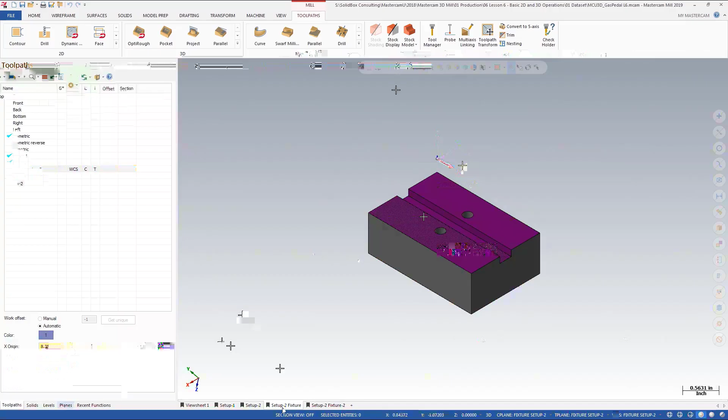If we view our stock, it is already ground to size in the Y direction, but we have to fit the top section exactly where our part's going to sit. So this is going to allow us to explore a few operations such as slicing, creating a contour, ultimately flipping this over so we can do the cores and drills on the other side.

But to get started, I want to explore how we would insert a manufacturer's model for something like a Vise. Now, a lot of times you get these from your programs, but it's always a good idea to insert this type of fixturing whenever possible, just to make sure that we can use it for collision detection and just understand exactly how parts are held.

To get started, we're going to go to File, Merge, and I want you to navigate to the location of the KURT D688-web file that's provided with the course. This file was downloaded directly from the KURT website as a SOLIDWORKS model.

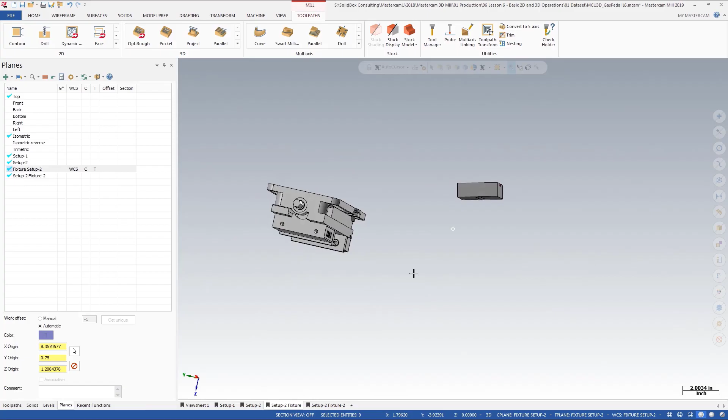When we open the file, I'm going to adjust the scale to 0.5 and simply say OK to accept its location. If we zoom out a little bit, you'll notice that its orientation is based on the original world coordinate system and not the coordinate system that's associated with the pedal itself. So this means we need to do a little work in order to get this vise in the right location.

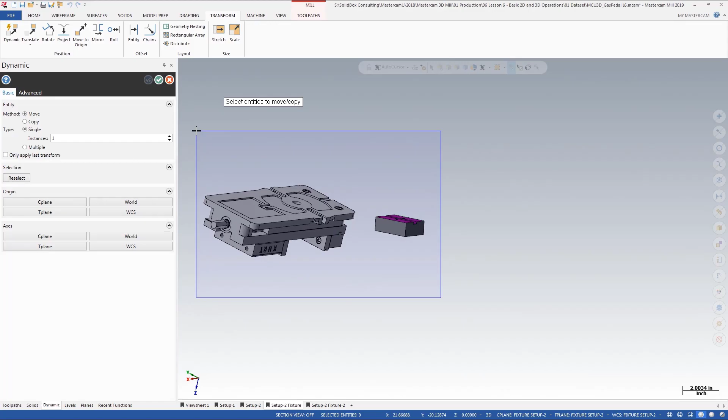To get started, we're going to go to our Transform tab and select Dynamic. We need to start by selecting all the components that we want to move. Now in this case there are quite a few, so we're going to box select everything and then click on our fixture to deselect it.

Once you've selected all of the Vise components, we're going to hit Enter, and this will move over to this section where we're going to place our gnomon. I'm going to start by placing the gnomon in this bottom left hand corner.

This way I can understand exactly where the part's going to be referencing and have a good location for this corner. We could also place it up here in the top corner if we wish, but for right now let's leave it in this bottom corner.

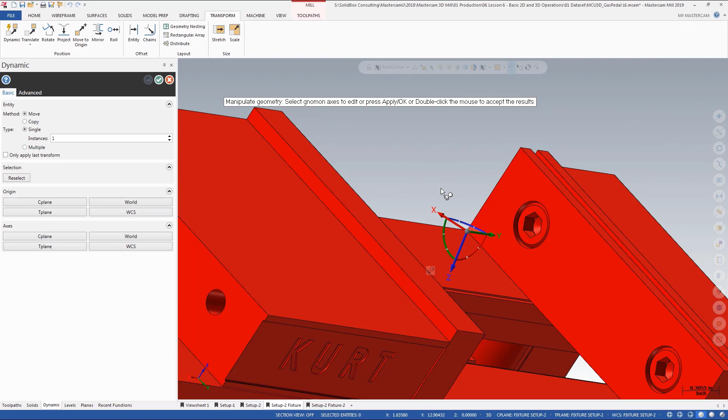One thing I want to note is the icon next to the mouse cursor. Right now it has a cube and a sphere. Now this means that any changes that we make are going to move all the components we have selected. To change this, we're going to press the Control key on the keyboard, and you'll notice that the icon now changes to an X, Y, and Z axis.

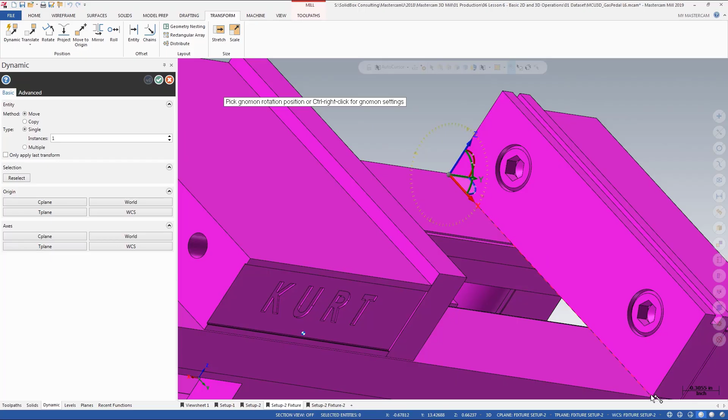This is going to allow us to change the orientation of the coordinate system. So by selecting the green arcs, we're now able to align it with the edge of the vise by selecting another point. Once we want to go back in to move this model, we can simply hit the Control key again and take a look at the coordinate system icon located next to the cursor.

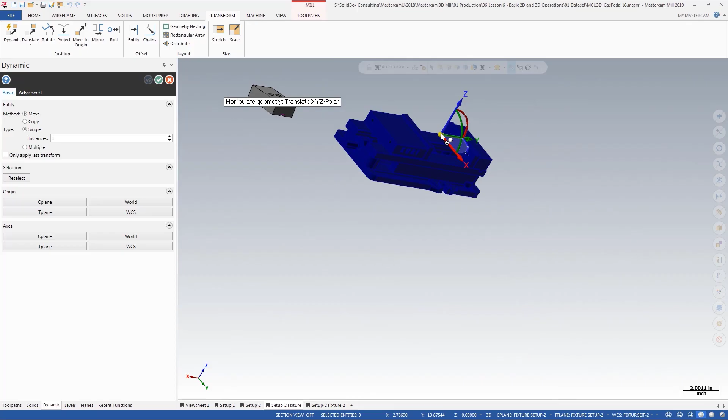It's now a cube and a sphere again. This means we're now in translation mode and we're allowed to move the vise around. So the first thing I want to do is click on the sphere at the center of all those axes, and I'm going to place it on my model.

It might be kind of hard to see, so sometimes you might need to rotate it around until it snaps to the bottom corner of our part. Once it snaps there, we're going to left click on one of the green arcs, and we're going to rotate that around until we snap to the other corner point or the edge.

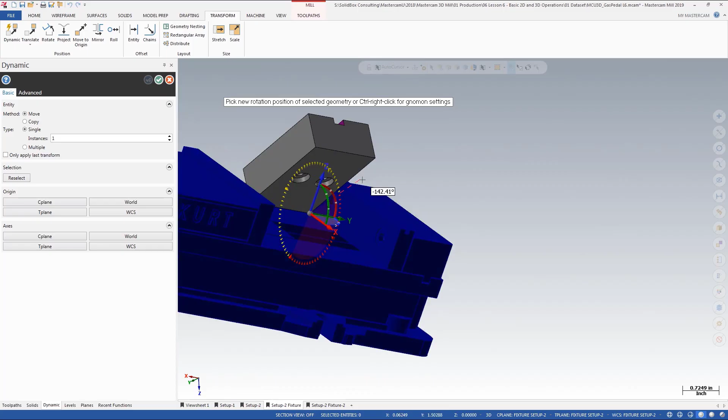Now you'll notice that as I do this, we're not getting the correct orientation of the part. What we want to make sure that we do is align the axes. So if I click on the arrow, I can snap it to the location of that bottom corner. Once we've placed it here, you'll note that it's sitting all the way at the bottom of the vise. Now ultimately we'd have a set of parallels in here, but I want to just explain how we can go about this process.

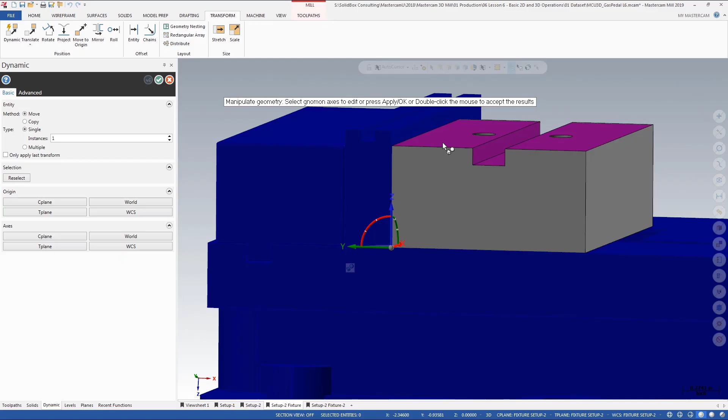I'm going to left click on the vertical section of the Z-axis, and I'm simply going to enter a value of minus 0.5 and hit Enter. We're going to hit Enter twice to accept that value. And now this is as if we have a half inch parallel sitting beneath the block.

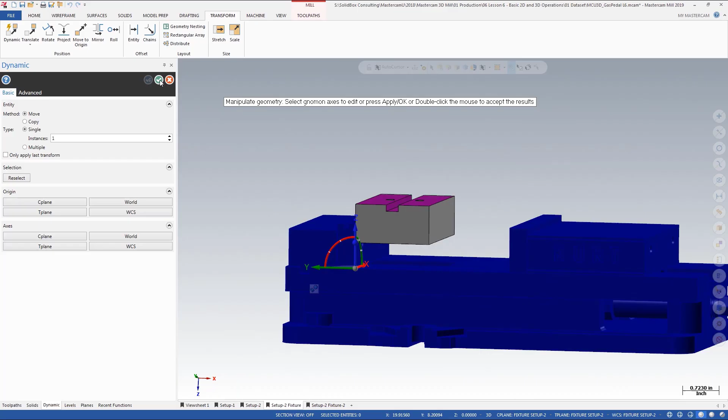Next, we're going to hit the green check mark to OK this, and we want to do dynamic transform one more time. This time we're going to move the back section of the vise as well as the threaded section on the shaft. We're going to hit enter to accept that. Again, we're going to place the gnomon, and this time we're going to place it at the bottom corner. And now we want to move this.

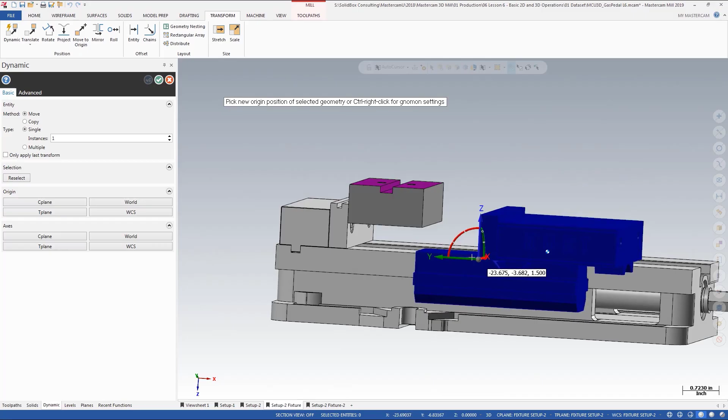I'm simply going to select the coordinate point, and notice that we're moving it up in 3D. Now this is not what we want, so I'm going to hit escape and simply left click on the Y-axis, because this is the only direction that we want to move it. Even though we're moving in 2D, we can tap on a 3D point to place that up against our fixture block. Once we're okay with this, we'll select the green check mark, and now we've placed the vise in our model in the correct orientation for our first machining operation for our fixture.

There's one more thing that we need to handle before we move on. On our Levels tab, you'll notice that there are several different levels that were created for the Kurt vise. It would have originally created level 1 all the way up to level 11, but because we had levels 1, 10, and 11 already taken, it simply split those and placed a single body on each level.

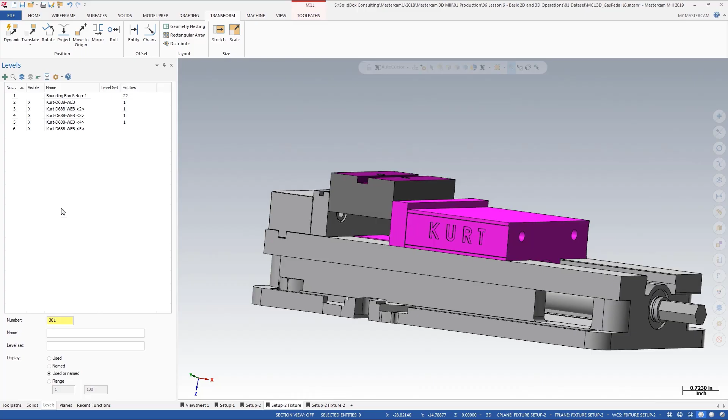We're going to start by creating level 301, and I'm going to name this Kurt. I then want to select all the bodies to place on that level, and I can do this by box selecting, then deselect our fixture, right click, and push those all to the active level, level 301. Now if we turn level 301 on and off, you can see that we have the vise turning itself on and off.

Now at this point, it's important to note and remember that we have a Mastercam University default levels list, and let's take a look at that image. So this vise is currently going to be used to hold the fixture for setup 2. So the vise itself will end up being on level 205 eventually.

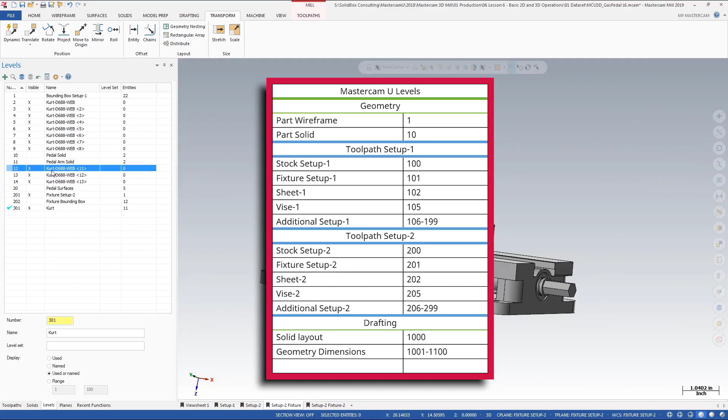Now ultimately I don't know if we need to copy it and make other versions where we potentially hold the fixture to machine it in the second operation, or if we just hold the fixture for the pedal. So keep in mind that as we start to build our levels, we want to make sure that we follow whatever standard, in this case the Mastercam University standard. So ultimately we're going to put this vise on level 205, but for right now we're going to put it on 301 as a placeholder.

Now I want to select all of the separate levels that originally had the Kurt vise parts on them and purge the selected ones. Because they're no longer needed, we want to make sure that we remove them.

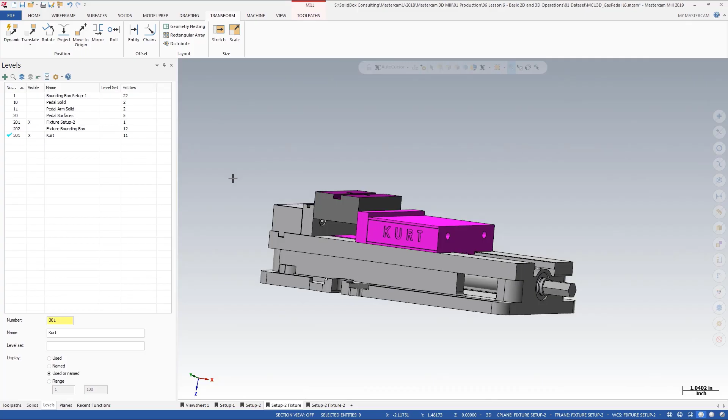Once we're okay with this setup, we can go back to our view sheet. We can turn on the Kurt vise level, which is level 301, and we can resave a view sheet bookmark. This ensures that we have all the bodies we want to see in this, and we can make sure that we're not accidentally machining portions of the vise when we start programming our parts.

As we move forward through our lesson, we will also use the vise in the flipped over position to machine the other side of the fixture. However, we won't be covering this because we've already covered how you can manipulate and move the vise around. The process that you want to use is to make a copy of the vise in that additional orientation and use the dynamic transform tools.

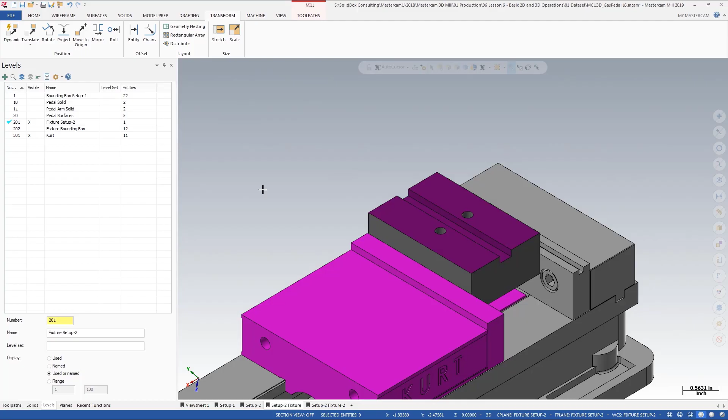For right now, make sure that you save your file so we can move on to the next step.